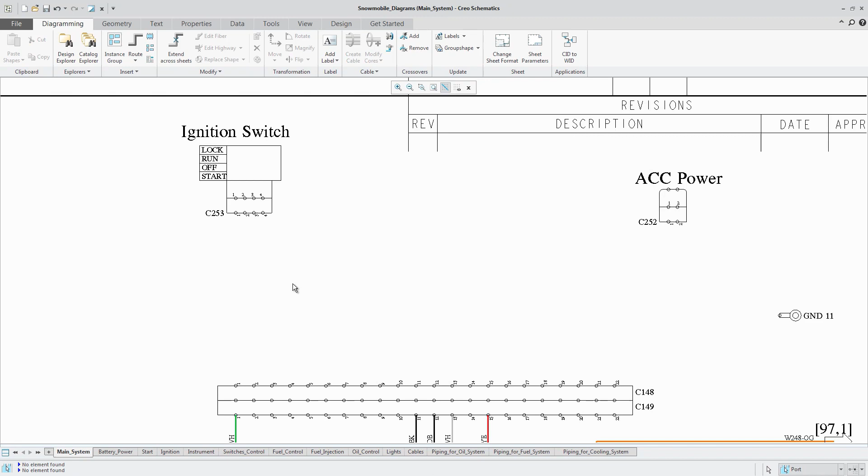PTC Creo Piping and Cabling Extension, or PCX, enables designers to create routed systems quickly and easily. These systems can be designed directly in the 3D environment or intelligently driven by a 2D schematic.

Starting with a 2D schematic, designers can quickly review wiring routes and connections to avoid errors. If a new wire is needed, it can be easily added in the 2D environment by simply selecting from a library of standards and creating the connection.

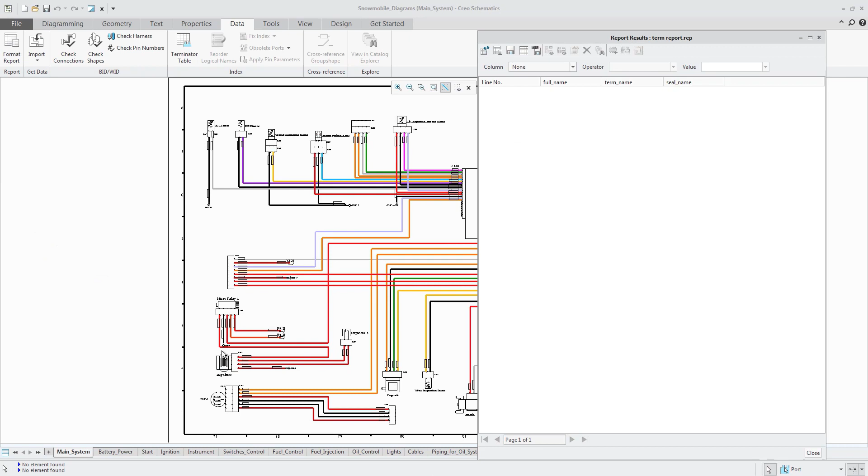This dedicated environment in PCX can improve design documentation and ensure design integrity is maintained throughout the process. The 2D environment also supports the export of wiring, cabling, and piping diagrams in standard formats, such as XML, and integrates with PTC's Windchill.

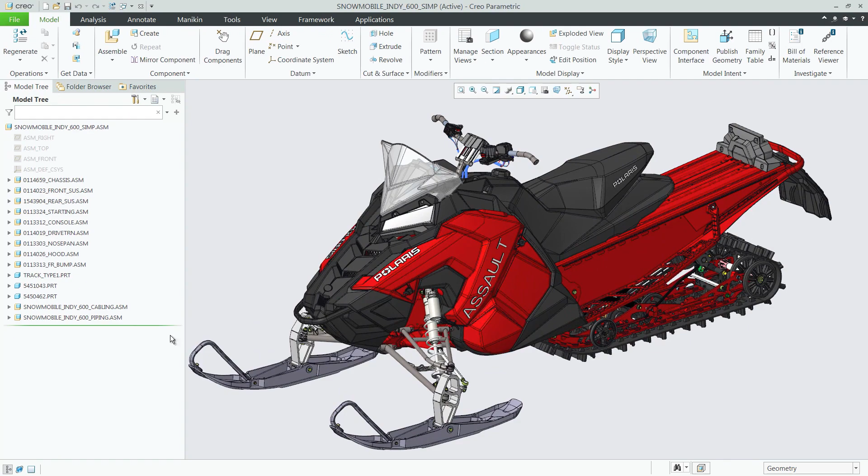Opening a cabling subassembly in the 3D environment, a newly added wire in the 2D schematic is ready to be routed. In this case, PCX automatically identifies an error, a missing connector, and prompts the user to fix the problem. Once resolved, the user automatically returns to the routing action they were executing when the problem was detected, ensuring a smooth flow to the design process.

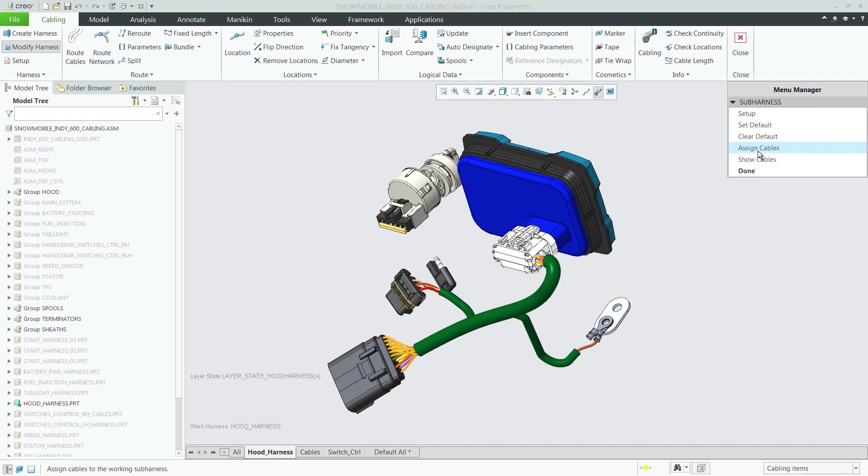In PCX, cables can be routed using different options, from a simple route to options with greater levels of control. And rerouting cables is easily accomplished through quick access to commands.

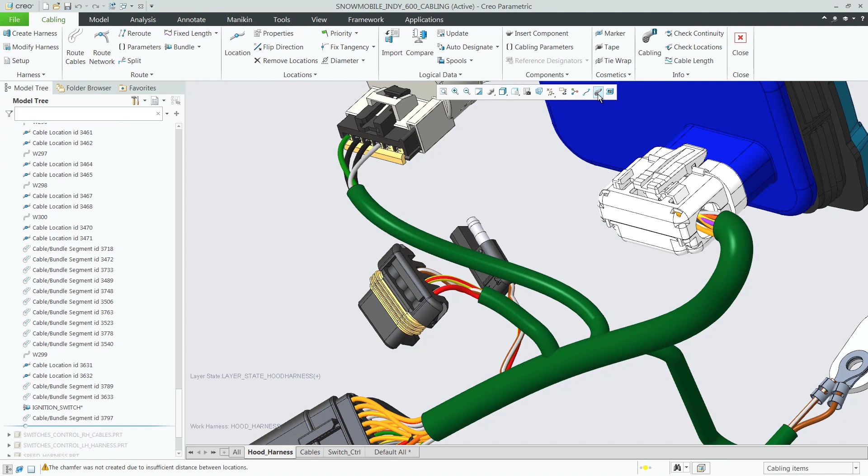In this design, 3 cables are routed to follow an existing cable route, ensuring a clean design, reinforced by Creo's constant visual feedback, achieving the design intent. Reroute can also fix interferences with surrounding geometry by selecting the cable and adding a location to avoid.

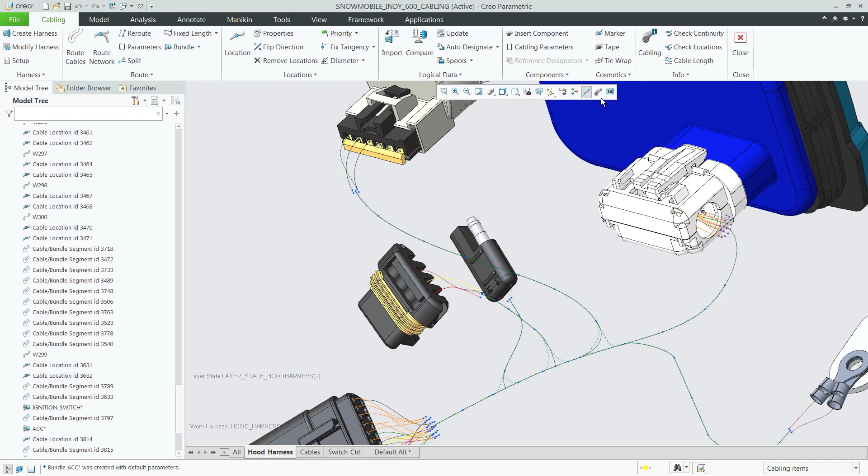If cables are disjointed in a design, Creo provides the tools to easily connect them. Using the Route Cables button, a design engineer can select specific wires, select disjoint wires and cables, and attach each to a corresponding disjointed wire or cable.

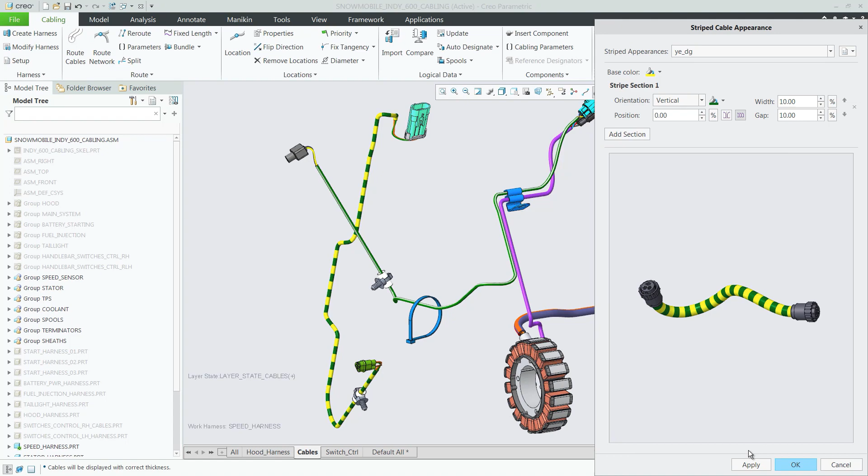To easily differentiate cables and wire, Creo enables designers to set color, stripe, position, width, and gaps to wire models. With the ability to control the appearance, these updates to wires are easily updated and shared in Windchill, shared drives, or the working area, and applied to selected spools and regenerated.

Tie wraps and markers are similarly created, updated, and regenerated. Creo enables faster creation and improves placement of these differentiators, and scales to Windchill and beyond.

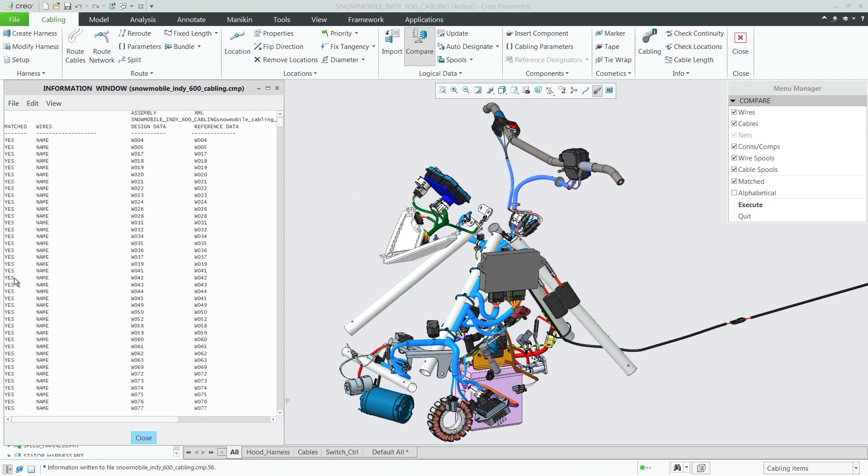Creating manufacturing information for the cabling is quick and easy. The 3D cabling loom is automatically flattened and the individual components can be displayed. Finally, the harness can be automatically output as a drawing, including a bill of materials, significantly shortening the product development cycle for products that include cabling.

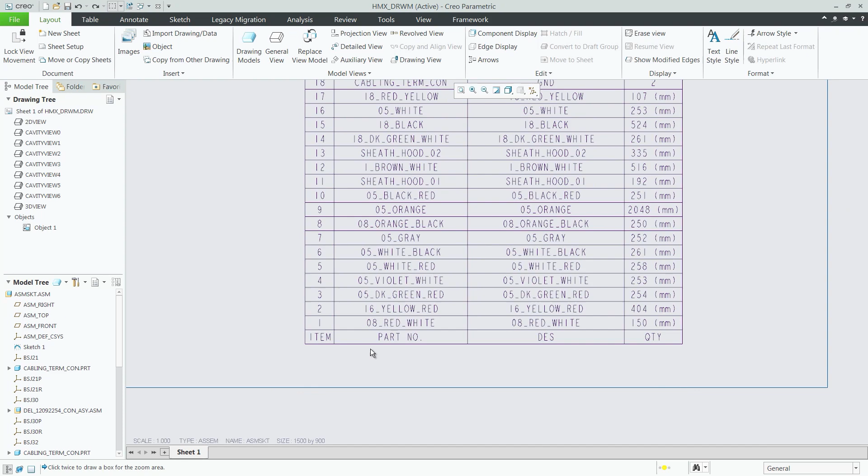As with all aspects of Creo, any changes to the 3D design are automatically reflected in the 2D drawing documentation.

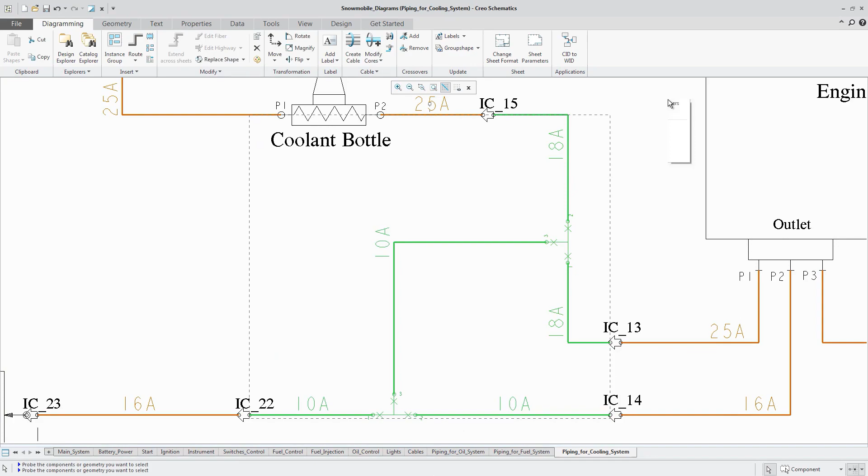Undertaking piping design with PCX is very similar to cabling. The engineer is once again presented with a dedicated ribbon UI, specifically for piping design. As with cabling, routing pipes is a quick and easy task. Simply select the start point and reference an existing pipe, and the new pipe is quickly modeled.

As with cabling, any changes are automatically reflected in the manufacturing drawings. In this case, the piping assembly, bill of materials, and individual pipe drawings.

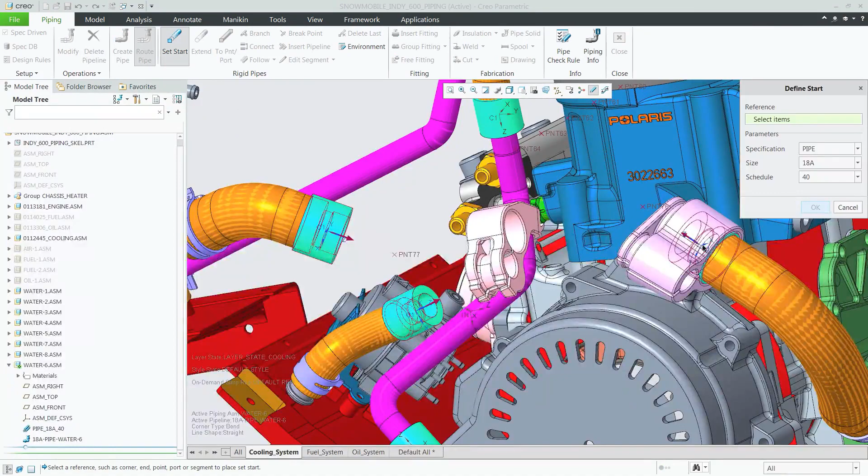With PTC Creo Piping and Cabling Extension, engineers can quickly and easily create routed systems designs using either a 3D modeling or 2D schematic-driven approach. With this efficient yet comprehensive extension, this intuitive interface improves productivity, easily accommodates late-stage changes, and cuts costs and time with fewer prototypes and shorter design cycles.

This is Creo, design as it should be.